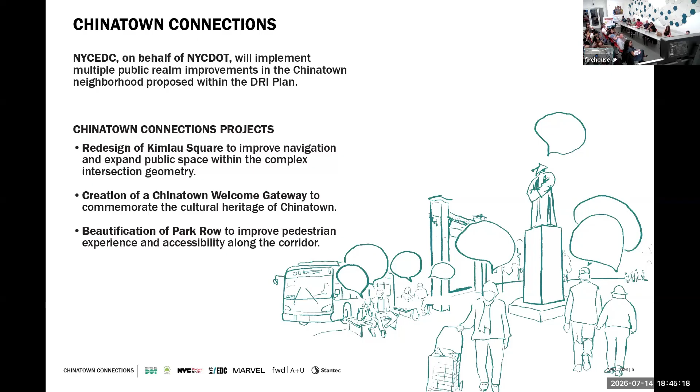So the redesign of Kimlau Square includes all these elements: realigning the intersection for public safety to deal with pedestrian safety crossing these crazy intersections, where kids and parents with strollers and senior citizens are dashing across and waiting in the median trying to figure out which way to go, with traffic cops there to navigate the crazy intersections.

The other component is expanding Kimlau Square. We've heard loud and clear from the community during the DRI process that they want more public space, an opportunity and a planned place for people to hold events, and to commemorate two of the most important monuments out there—the Kimlau War Memorial Arch and the Lin statue—which currently reside very close to each other on the current Kimlau Square Plaza.

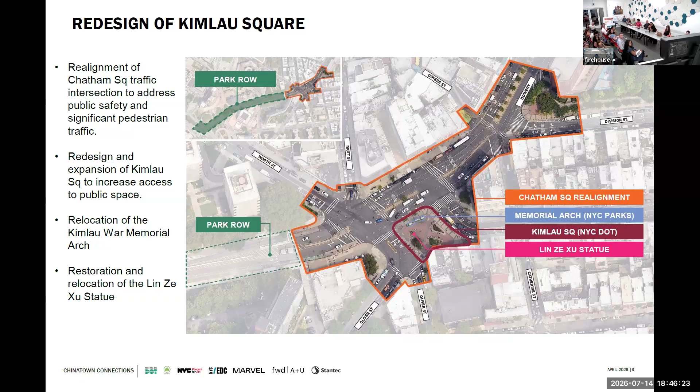So we also have the Welcome Gateway, which we're starting the process of exploring—what it means to the community and to Jennifer Lemon, who used to live in Chinatown. She'll talk more about her process, and before that, we'll talk about how we got to selecting the artists for this very important element of the Chinatown project. The gateway is meant to highlight Chinatown's cultural heritage.

And then we're going to take the final design and start to look at all the elements that will give it the connection and connective tissue that the Chinatown Connections Project really needs.

Beautification of Park Row is another very important element. We're early in the process for this. We've done a survey of the existing Park Row conditions, and with the generosity of the DRI, New York State grant, we have money to do some work there.

We know that right now it's currently being used. It's still a route where the buses come through. It's also where pedestrians are crossing and coming over from City Hall and Brooklyn Bridge. It's also a means for emergency vehicles coming through, as well as bikes. So in 2026, we're looking at all the modes of transportation coming through this area.

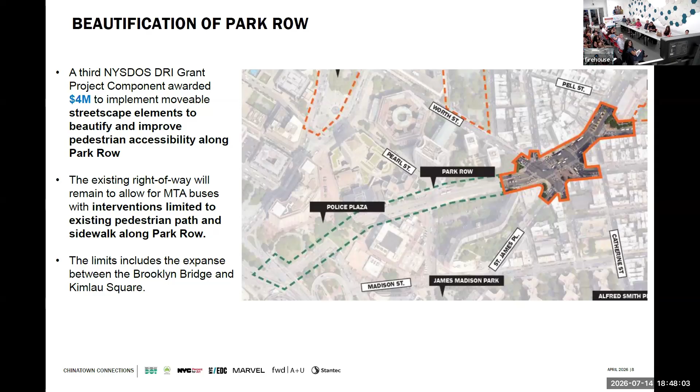So these are what you see right now, what we are trying to address, and it is the Chinatown Connections Project. So next slide. So where are we today?

We are still continuing to reach out to everyone. You'll see us over and over again. You might recognize Ishita and Chit and Janielle. They've been out there, myself, Sarah's been out there. DOT's been at every single meeting we've had, and we've had numerous meetings. We're also out there with Jennifer and March. She's done a tremendous amount of outreach, and I think in the deck, as we turn to Marvel, you'll start to see the kind of outreach we're doing. Perhaps we're not getting to everyone, but we're hoping that with some of the meetings we're having, others are actually telling other folks to come and participate and be part of the CB3 meetings.

We're at CB1. We have Chinatown Connection working group meetings with stakeholders and also elected officials, representatives of the community. So we welcome you to attend all these meetings and come and talk to us, because I think it's important. It's an important project, and it's important to listen to your voices today.

So I think we're gonna turn it over now to talk about community engagement. Thank you for letting us come back and speak to you a little bit more about our process. As Kathleen mentioned, I'm Ishita Gore, director at Marvel focused on Urban Design Planning, and I've been leading this robust design team and DOT EDC team for the design and community engagement on this project.

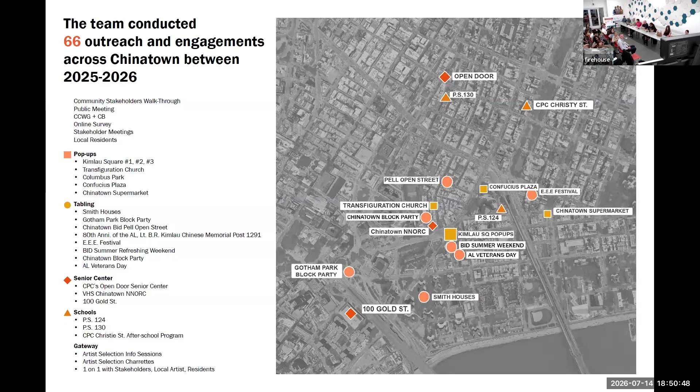In addition to that, we did have an online survey where we had almost 200 responses. We asked people for their zip codes to identify their location, and 70% of those responses were from Chinatown zip codes.

Additionally, as Kathleen mentioned, the CCWG, the Chinatown Connections Working Group, predates our team's involvement in this project. But because of the wide range of different pieces and all of the different stakeholders and interests in our community and our public space, the CCWG has really been critical in providing their feedback and helping us navigate the issues and opportunities of this project.

The other thing I wanted to highlight, as Kathleen said, is our hope has been that we are planting seeds that multiply and create awareness of this project. But if there are glaring missed opportunities, please reach out to us, we are happy to have those conversations. Especially at the last CB3 meeting, there were some topics and business owners identified that we should be speaking to and may have missed, and we've made a concerted effort to engage with them between now and hopefully the end of summer, so September, October.

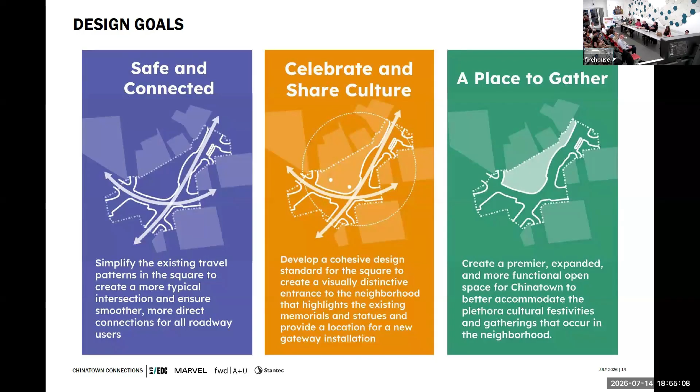So that's the overarching community engagement update that we have. I'm going to transition to our next topic, and happy to take questions afterwards, with the Chinatown Welcome Gateway.

The Chinatown Welcome Gateway, as already mentioned by Kathleen, was one of the components of the DRI plan. The process led to the selection of a subgroup, a committee, that helped write the Chinatown Welcome Gateway brief, which served as a guiding document for the selection of the artist who would eventually design this Welcome Gateway.

The process was led by DCLA, Department of Cultural Affairs, and they were very adamant about how it needed to be a community-driven, community input-based process.

The Welcome Gateway Design Brief was created by the subgroup, comprised of community leaders who helped write this brief. It's also on our website at ChinatownConnections.nyc. Members included the United Overseas Fujianese Association of America, community leader Nolan Chen, Wellington Chen from Chinatown BID, Gay Mui from American Legion, Raymond Sang from Chinese Consolidated Benevolent Association, as well as Cheryl Wing Ji Wong, local artist.

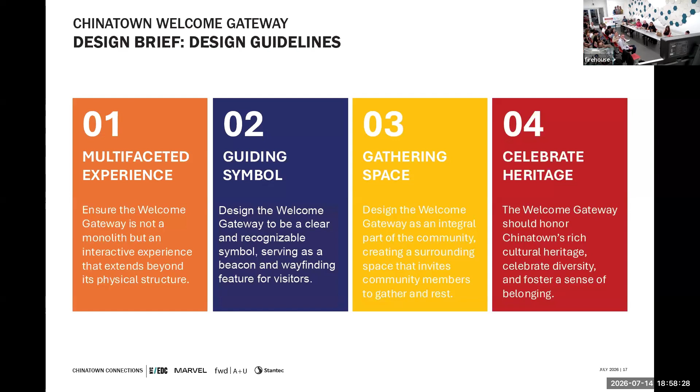The artist selection process is broken down into 3 phases. The initiation phase happened with the writing of the brief and the selection of panel members who would eventually select the artist, as well as the community being able to participate on that panel and provide their input.

I want to highlight that while this is not percent for art, because percent for art is 1% of the total project cost going to the project, this process is based on percent for art. The allocation for funding is through the DRI and is actually more than 1% of this project, as we know it's 2.5 million.

The artist selection process was also a community-led design process, which included - and I'll walk through these steps - panel meetings. We invited the community to provide who should be shortlisted to interview. We provided the community to join meetings where we interviewed the panelists and provided their feedback.

A new term I learned from that process was the passion pleas, where people were able to make passionate pleas on selecting the 4 shortlisted panelists.

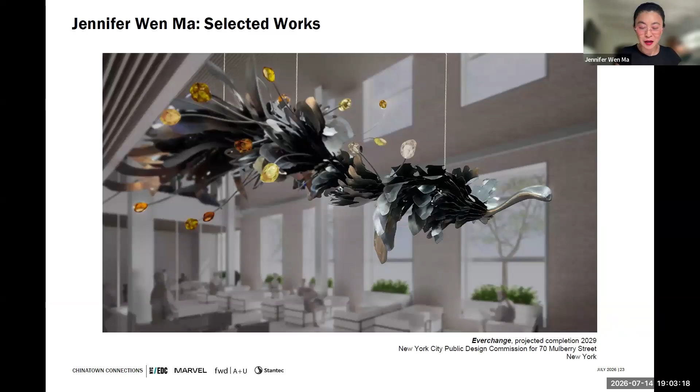I came to Chinatown, Manhattan, Chinatown in 1999. This is when I moved to Chinatown, actually on Division Street. Can you hear me okay? Want to make sure.

Okay, great. I moved to the States from China in 1986. I moved to Oklahoma City and lived there for 8 years - talk about a cultural desert for me personally. So when I moved to Chinatown in 1999, it was in some ways a homecoming and a rediscovery because of the vitality and vibrancy of Chinatown. I called that Chinatown home for 24 years and lived there, worked there.

And I continue to work there. I actually have an exhibition that will open, I think, at Chinatown Gallery in August. So August 14th, I invite everybody to that opening and to have more conversations.

So today I'm here to meet everyone for the first time in the public sense. I was selected last August, but I didn't come fully on board until March because it took a lot to have the contract and all of that process done with the city. But I've been thinking about the project for a long time. And as many of you know, this project is probably its third iteration, and I actually was involved in the design bit in previous lives as well.

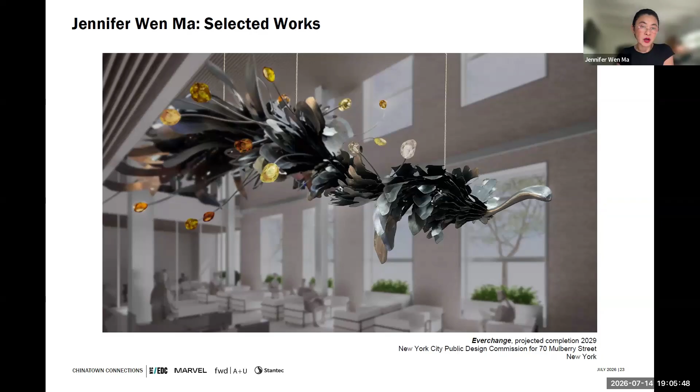The next image is just to give you a little bit of background on the kind of work I've done. I'm a contemporary artist. I've worked internationally across many venues. This is another public and permanent piece.

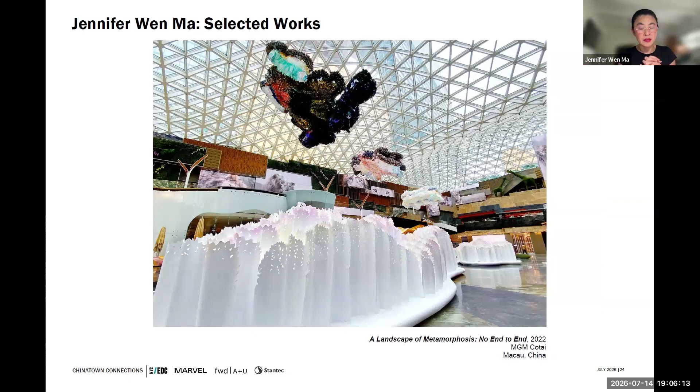So next slide, I just want to talk about being from Chinatown, having lived and worked here for 20 plus years. I did not want to just rely on my own impression of what Chinatown means to me, but what it means to various people. So the major stakeholders, from the Fujianese Association to American Legion and BID, Chinatown BID, these were the first people I had conversations with.

And since then I've met with CCBA, Think Chinatown individuals. I've met with many of the board presidents, board members, and shareholders of various residence communities in Chinatown, such as Smith Houses, Chatham Towers, Chatham Green, Confucius Plaza. I'm also visiting after-school programs as well as senior centers, and there are more engagements coming.

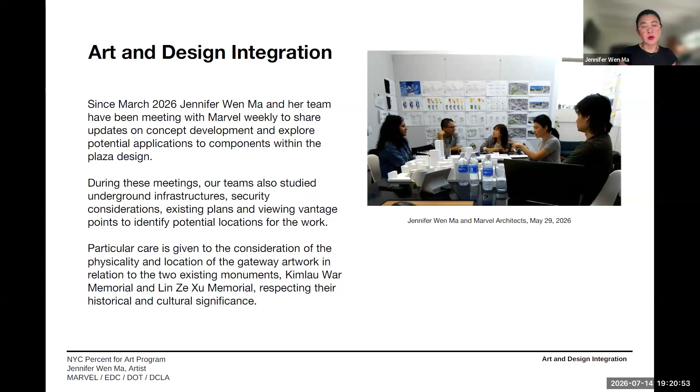Very tough act to follow, but now we're going to move into the redesign of Kimlau Square. Just for reference, my name is Casey Burrell, I'm with the Department of Transportation. This is a significant part of the project from a transportation perspective.

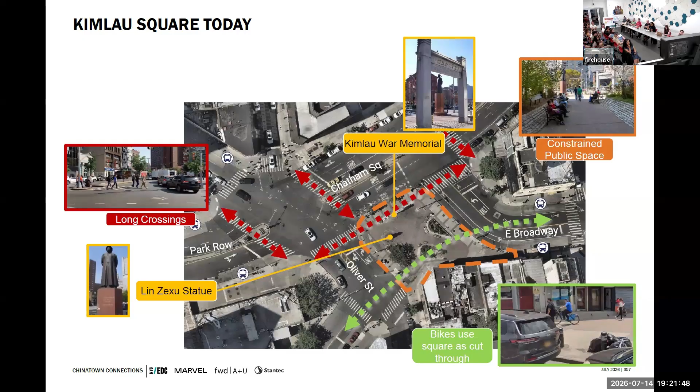In the interest of time, we'll go through some of these pretty quickly. They're from past presentations, but just to remind everyone of the square today: there are long crossings across the Bowery, and the existing two memorials, the statues of the War Memorial and the Lin Zexu statue, are on the south side. The space is relatively small today for those really large events, and a general thought about the square today is that it's chaotic. You're crossing the street, fighting against cars coming into you, and trying to really rush out here.

Looking at who's using the square today, the majority of users are pedestrians, with almost 10,000 people in the peak hour. Almost 80% of people in the square are people walking, so that's really our primary user of the square today.

However, when looking at how much space is given to those people, 66% of the square today is paved roadways, with only 33% for actual people using space on sidewalks or in the square. So we really want to make sure we're trying to right-size the space given to each of these.

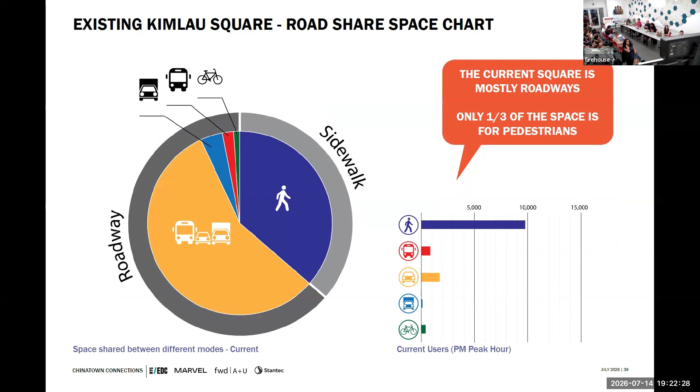From a very high level design principle standpoint, from a roadway perspective, we want to reiterate that standard four-way intersections are safer. They're more predictable for pedestrians and they function more smoothly from a vehicle operation standpoint. Straight-through travel movements for vehicles are more efficient and safer than turning movements.

Shorter crosswalks reduce exposure, are more accessible and easier for pedestrians. This is a neighborhood that has a lot of seniors, as well as parents raising their kids, and those people who need more time to cross the street. So a shorter crossing is better for them.

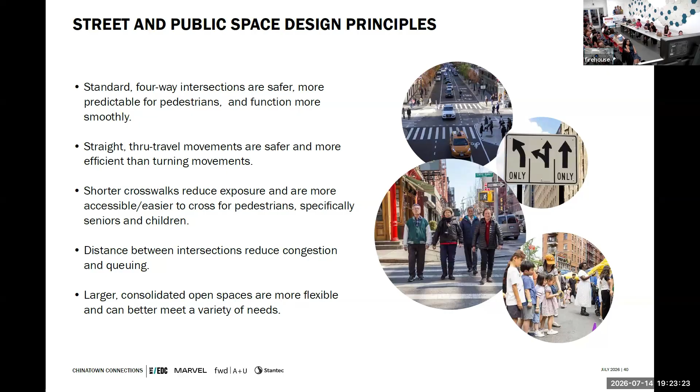The distance between intersections improves vehicle circulation, so clusters of intersections are chaotic and congested. And from a public space perspective, a larger, more consolidated space is more flexible to provide more options for programming events for the community.

When we started this process, we had a very typical design process from the DOT perspective. We have to work within our existing property, working with the building lines. We're not coming in to tear down buildings and refigure everything. We look to align the intersection to meet the travel patterns, really wanting to create four-way standard traffic movements. We then work around some of the existing conditions, but recenter them if needed to create a more decent design. And then we prioritize creating the largest public space possible as part of this project, but really unique to the community.

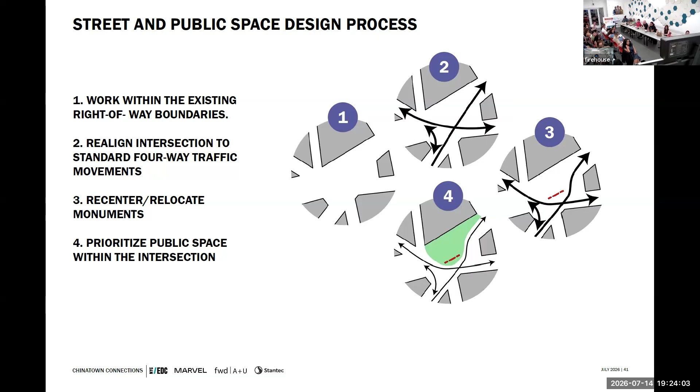Considering some of the alternatives that were also considered as part of this process: one was renovating the square in place. That does have some serious challenges where it doesn't fix any of the transportation needs. We still have a high percentage of vehicles turning on pedestrians, the crossings stay the same, and space overall stays the same. It really wouldn't meet some of the challenges we've heard about to fix some of the public space issues here.

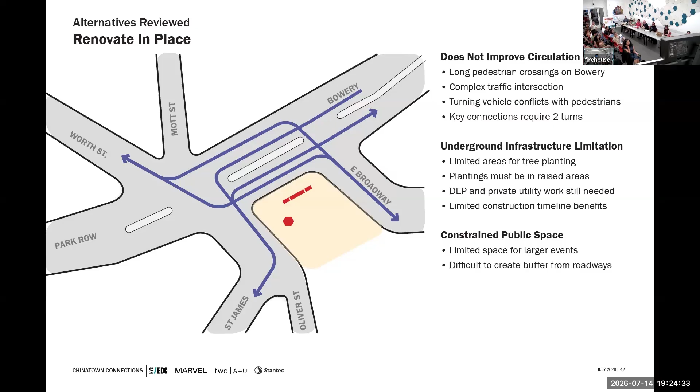What if we made it a circle? What if it was a traffic circle? In general, traffic circles are highly inefficient from a processing standpoint. They're also very chaotic for people to cross on foot. They require very complicated signal timing, wide roadways, and that would probably wind up with a smaller square in the end, and it would still have a very congested feel, with a square surrounded by traffic on all sides.

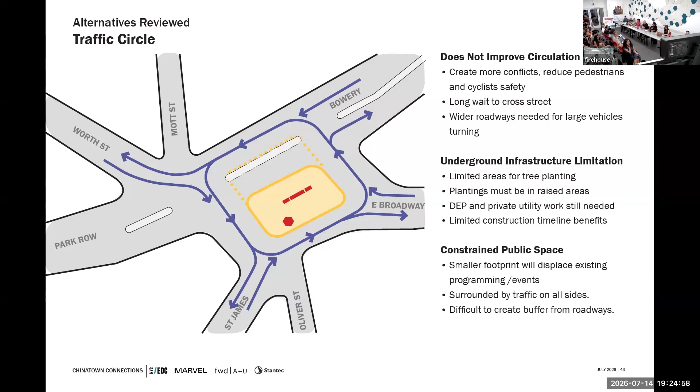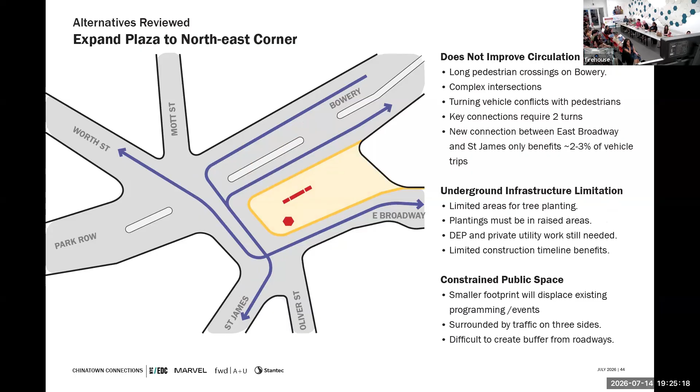What if the square is moved to the eastern side, to connect more to Confucius Plaza? This would still create pretty convoluted vehicular travel patterns. It wouldn't really shorten some of those crossings across Bowery, and it would result in a square either the same size or slightly smaller.

So the design that was chosen was to switch the plaza from the south to the north. This allows for a direct connection for people traveling along St. James up the Bowery and from Worth Street to East Broadway. It creates standard four-way intersections which are safe for pedestrians, creates a wider public space, and simplifies the overall operation.

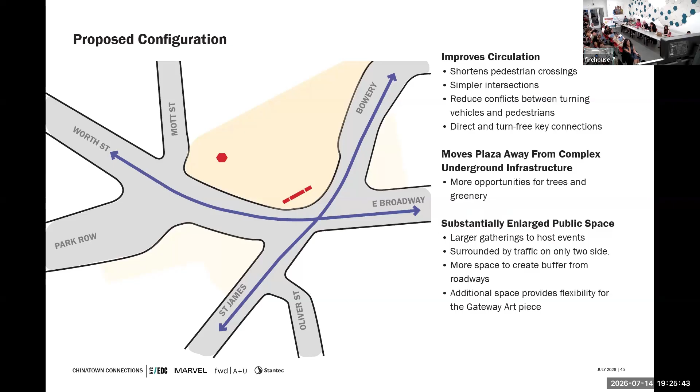This allows us to recenter pedestrian space. It makes the square up to 50% for pedestrians, who are the main user, by shifting some of that space into the public space and the square.

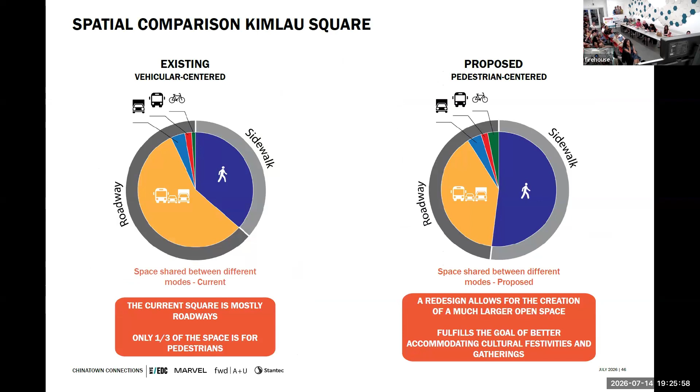From an analysis perspective, we are still fairly early. We're taking the design concept created by Marvel, looking at underground constraints that are driving some of the utility impacts for this project, and taking the DOT traffic studies in progress and merging them all together. So we're still in the preliminary design phase. We don't have final results yet. We'll be coming back as the design progresses to narrow down the considerations from an operations perspective and a detailed design perspective.

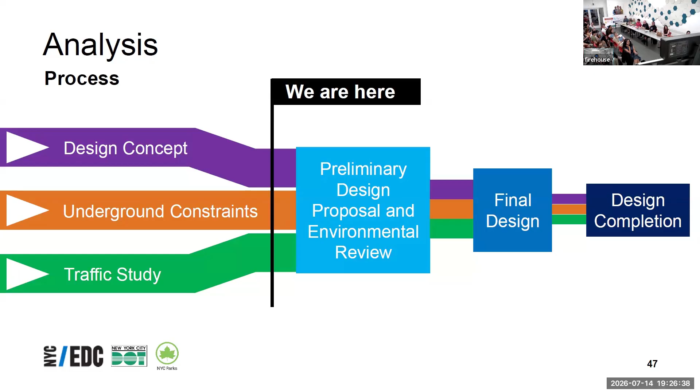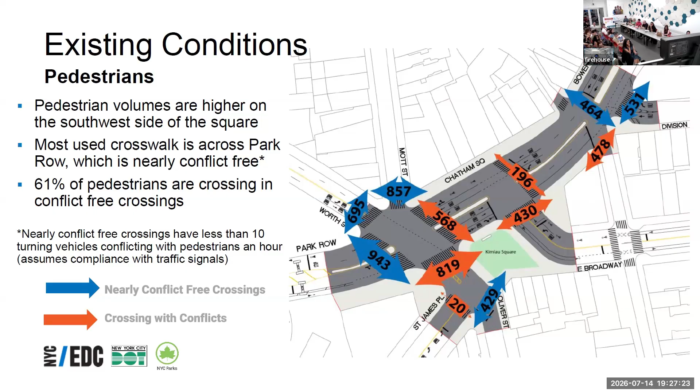For pedestrians, volumes are higher on the southwest side of the square today. The most used crosswalk is crossing Park Row on the south side, and today 61% of pedestrians are crossing in a conflict-free crossing, meaning that crossing and crosswalks with cars are not going to conflict.

Today in the square there are 7 conflict-free crosswalks, where you cross without vehicles turning across you, and 5 where you do have conflicts. The average crosswalk length today is 56 feet, and the maximum crosswalk length is 90 feet.

In the proposal, we're adding 1 new crosswalk as part of the design. It would have conflict with vehicles. The average crosswalk length is reduced by 10 feet, and the maximum crosswalk length is reduced by 17 feet. Where turning vehicles cross the crosswalks and pedestrians, the total number is much lower, so you're not competing with as many vehicles trying to get to their destination.

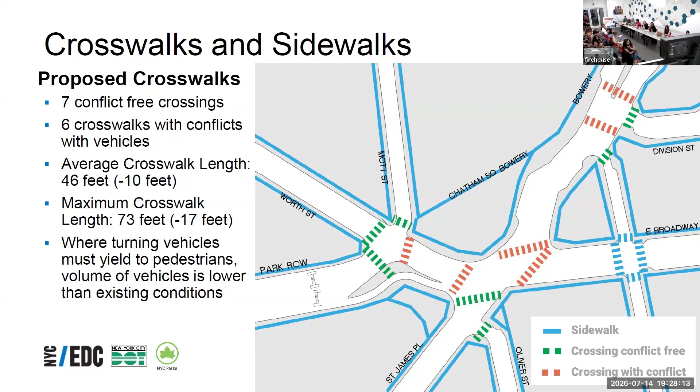From a vehicular standpoint, today there's a lot of delay at the intersection due to complex signal timing and closely spaced signals and intersections. These arrows represent the top 5 movements in the square today, which represent 45% of the traffic — a very small number of movements make up a big bulk of the traffic moving through the square. There's the elbow movement from St. James to Worth Street, the through movement from St. James to Bowery, and the through movement from East Broadway to Worth.

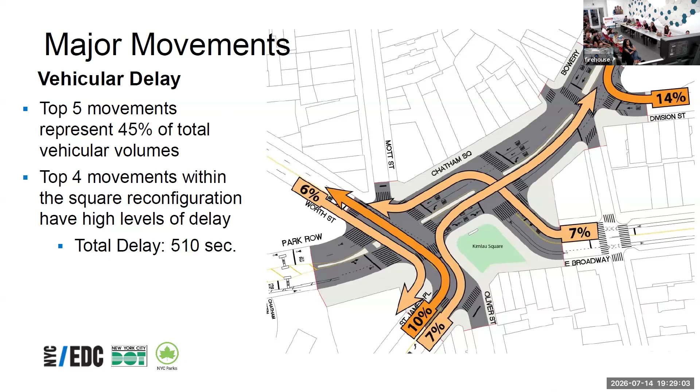In total, these top movements combined represent 510 seconds of delay for people driving through the square. In the proposal, that total delay is reduced by 14%, to 437 seconds — not a massive decrease, but an improvement for people driving through the square, and the maximum delay movement is reduced by 60%. These are preliminary results; we'll have more information to share as everything becomes more finalized. This is some of the initial takeaways for the preliminary design stage we're at.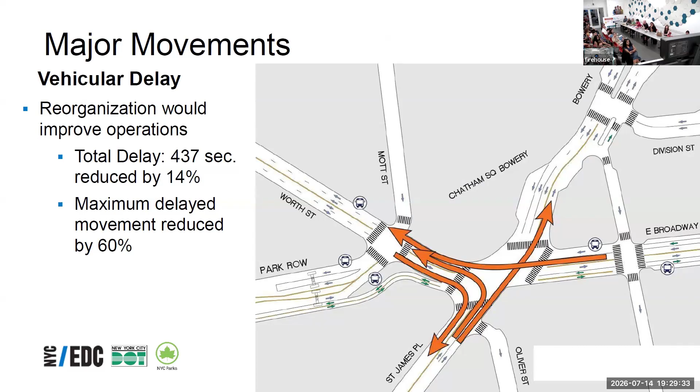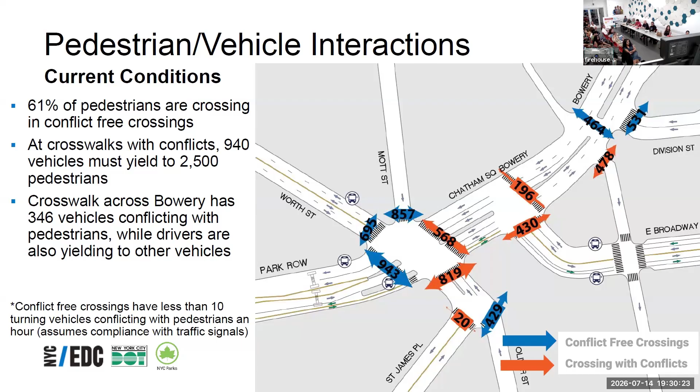In the proposal, 55% of pedestrians are still crossing at conflict-free crossings. At the crosswalks that have conflicts, we're reducing the number of vehicles pushing through by 47% by converting those turn movements to through movements. At the crosswalk with the highest conflict, across Worth Street, the number of vehicles is reduced to 170, and it's a right turn, which is safer than a left turn because you're not yielding to opposing traffic.

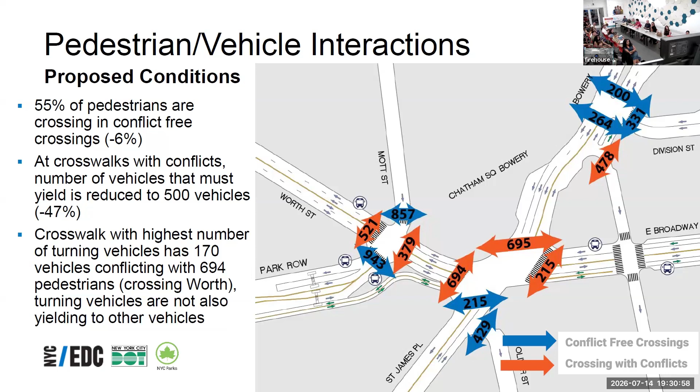From a bicycle perspective, we're making a minor change to the bicycle network by consolidating movements to the south side of East Broadway, connecting to the path that exists on Catherine Street.

This kind of shifts a lot of bike movements away from the square, so people at the square won't be competing with people trying to go on the square on a bicycle.

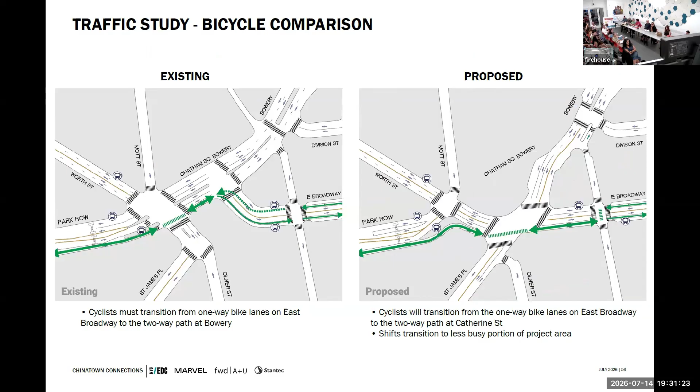From a bus perspective, the bus stops in general remain in their current locations, and with the reorganization, we're straightening out a couple of the bus routes. So the M22 would make a continuous movement, and then the other buses would still be in conformance there.

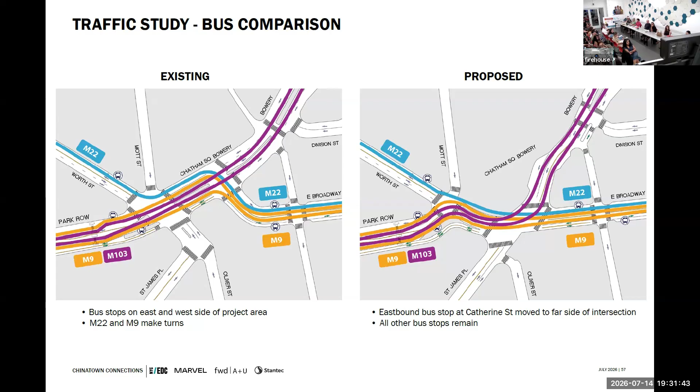Next steps from the analysis perspective: we're continuing to refine the traffic study as design progresses and unify the underground and above ground analysis. We'll be presenting additional updates on the proposed signal timing and the curb management strategy as design progresses. That is, yes.

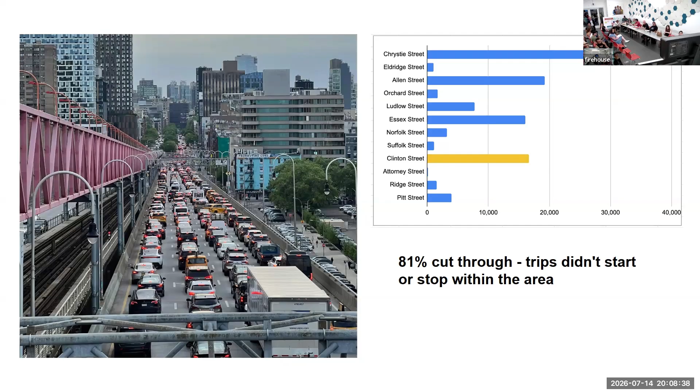Drivers making a turn on Rivington, Stanton, or Houston have to wait for crossing pedestrians, which holds up all traffic behind them. Clinton also turns into Avenue B at Houston Street, which causes more delays with turns, as Avenue B and Houston are both two-way, which creates a lot of clashes of turning. So as a result, the flow rate of traffic onto Clinton from the bridge exceeds the rate of flow off Clinton, which causes this chronic congestion.

This congestion causes impatience and reckless driving. Drivers run lights, block intersections, and swerve around obstacles. A pedestrian died in a hit and run in December when a driver turned right from Clinton Street onto Stanton Street.

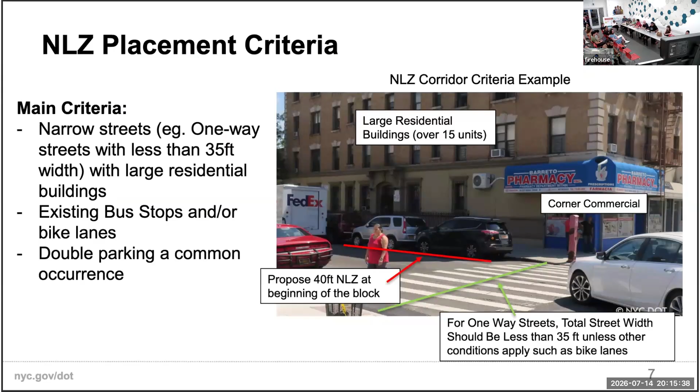The open street on Orchard instantly transformed it into the most popular street in the neighborhood. People-first streets are great for safety, great for the environment, great for quality of life, and also great for business.

Just one parting thought about why I care about this so much personally. I've lived in New York City for 10.5 years and in this neighborhood for the last 3. I'm a homeowner on Clinton Street. I'm getting married later this year and we'd like to start a family here together. I really love this neighborhood and I'd love to be able to stay here. But the thought of my kid walking to school, or learning how to ride a bike, or visiting friends on my street is just super scary.

I don't mind the noise or the crowds or the party goers or other aspects of the neighborhood, but the drivers are really, really scary. So please help me make it easy to think about where to raise a family in your city. Thank you.